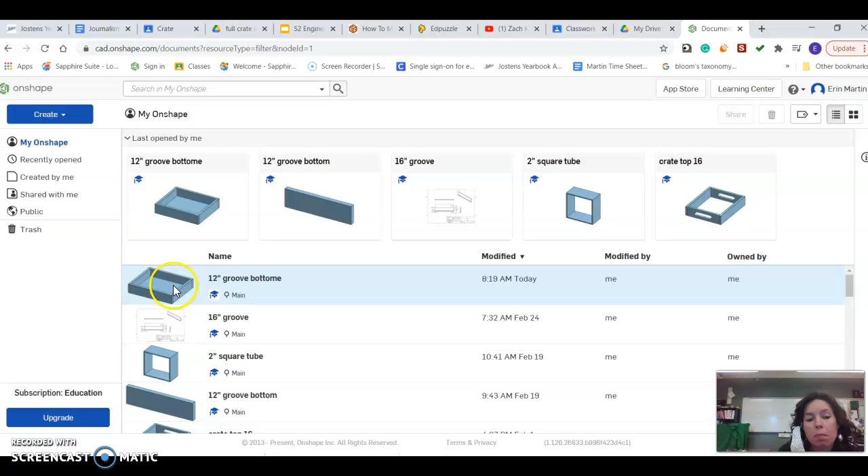In this instructional video, we're going to take a look at adding your stiles to the bottom of your crate. So the first thing you need to do is make sure you can successfully open the bottom assembly to your crate. I would not necessarily think of this being my bottom assembly, except that it's pictured here. The reason it's named my 12-inch groove is because the same main file that I made my groove part in, my groove drawing in, is where I started my assembly. So that's why the assembly takes on that name.

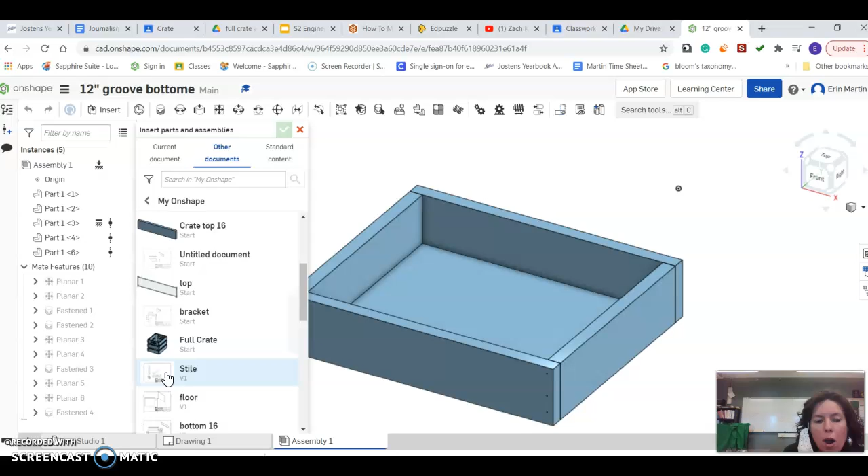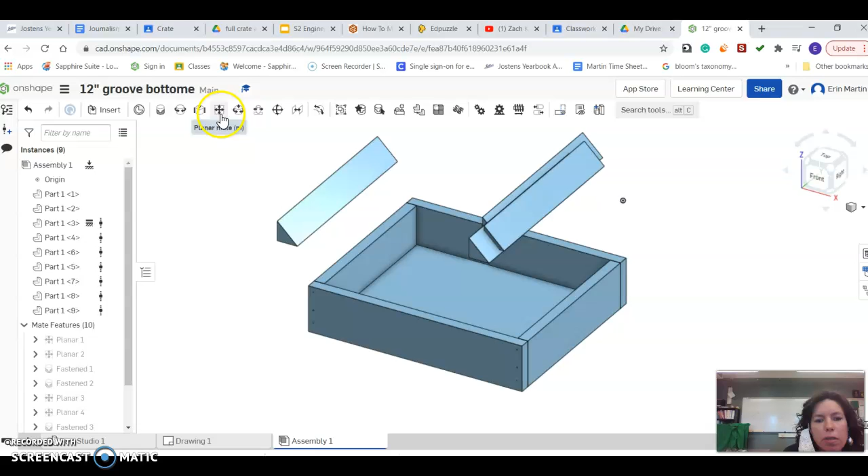So the first thing that I need to do is insert my stiles. If you haven't made those yet, you will need to make those. And again, you might find them as a drawing instead of a part, but it'll show up as a part for you to place in. So you will need 4 of those. I have placed my 4 stiles in, and I'm going to install them one at a time. I'm going to start with a planar mate. We are going to take the bottom of the stile and make it planar with the top of the floor.

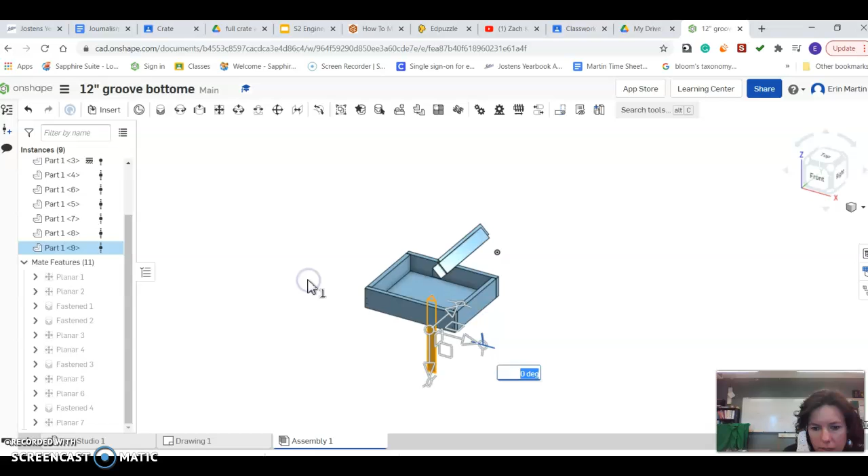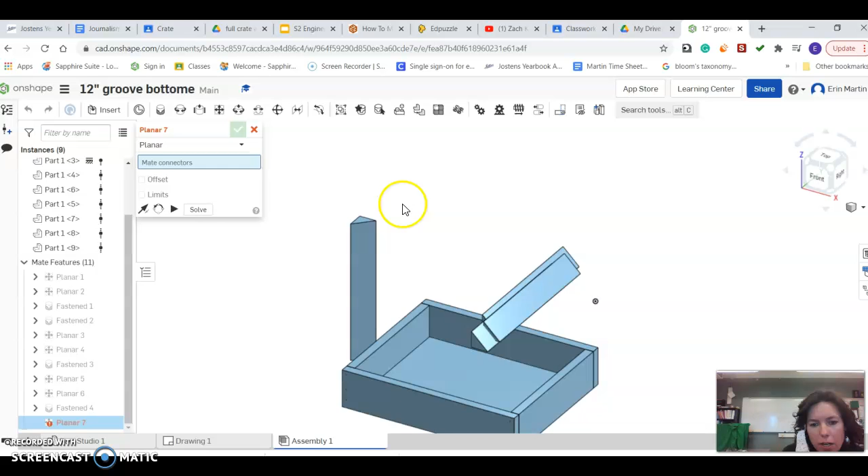I am then going to grab a hold of the stile. You know what? I think there's a step that I should have done first. Let me go back. Before I start, I am going to stand the stile upright. I believe that makes life easier. Now I'm going to go planar: top of the floor, bottom of the stile.

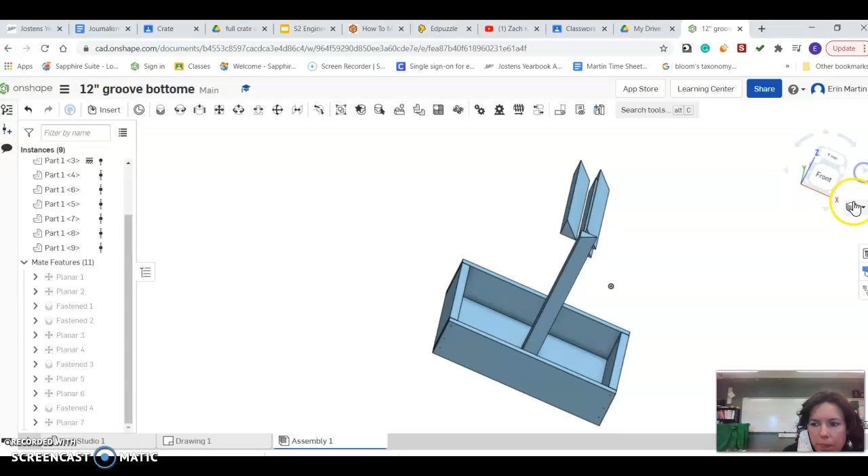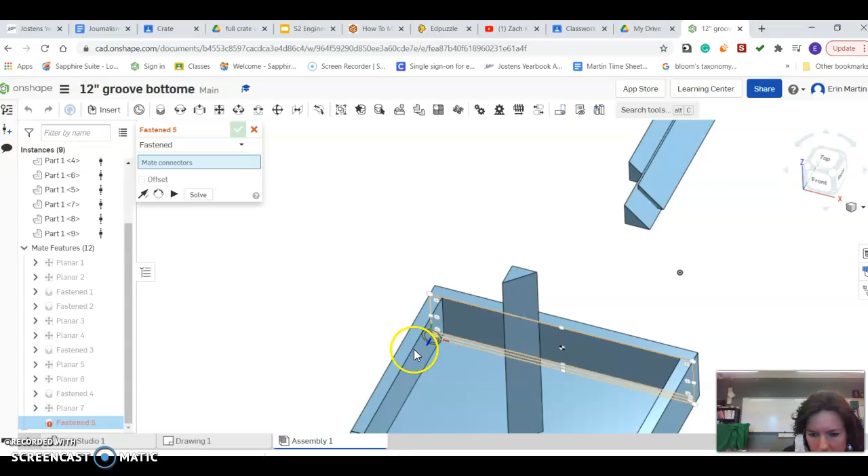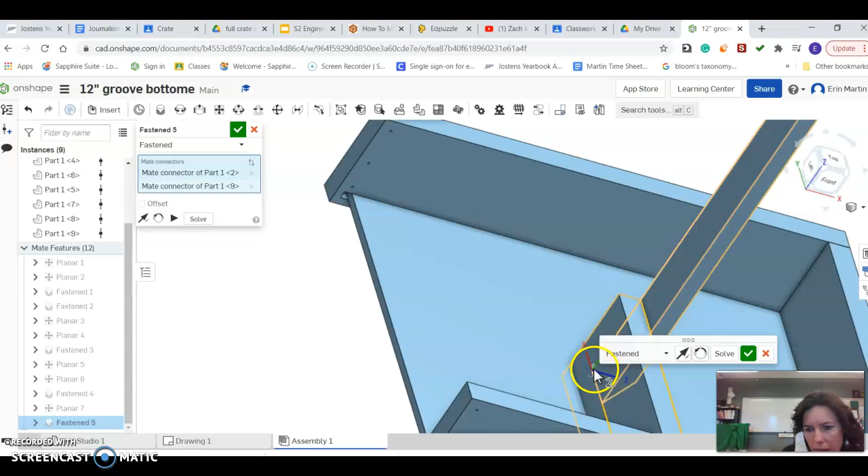So now that stile is sitting in there somewhat correct, I'm going to take that stile and put it in this corner. I'm going to use a fasten mate to do that. And I am going to choose this bottom point, and this bottom point. Don't worry if it looks odd at first, it should jump back into place. And now this stile is connected.

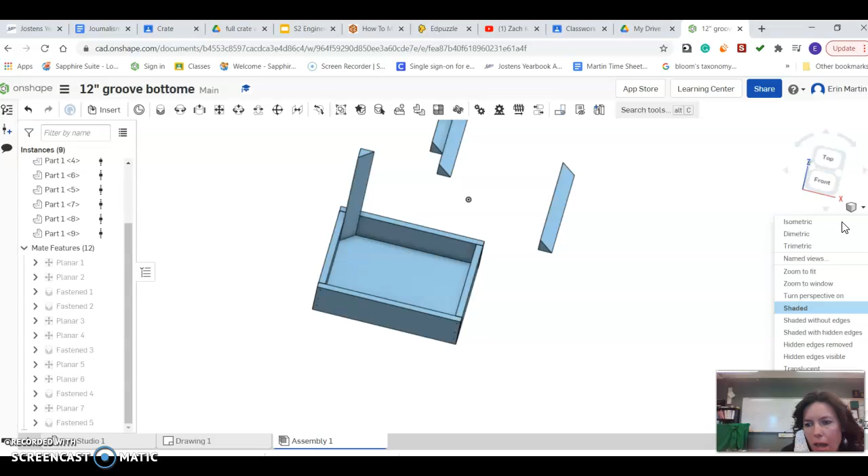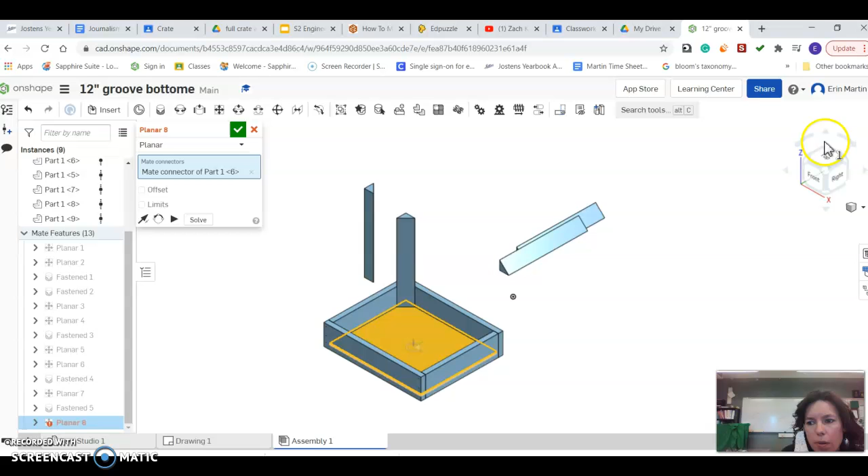So now I'm ready to do the same process to another stile. I'm going to take this stile and start by making it 90 degrees. And depending on where I'm placing this one, I will also want to rotate it another 90 degrees. Now the stile is ready to come into place over here. So again, I am going to start with that planar mate, top of the floor, bottom of the stile,

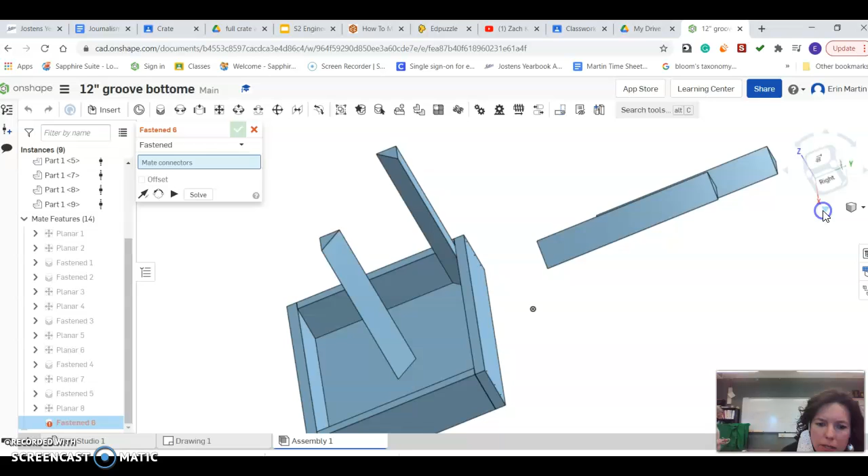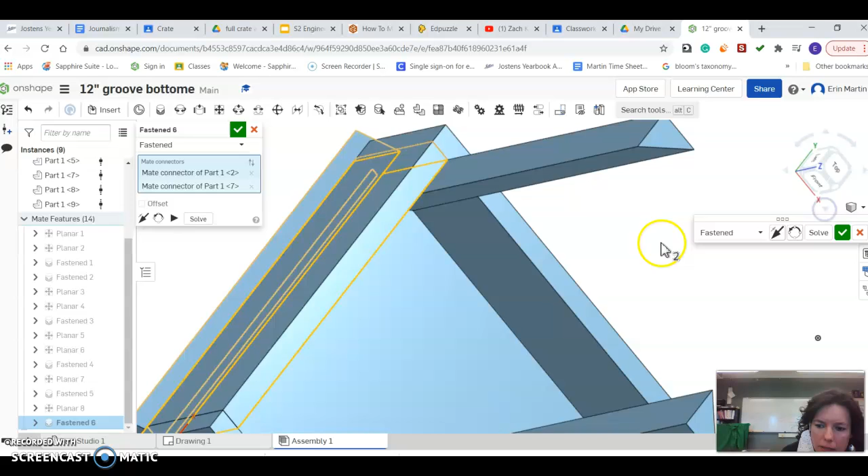and then I'm going to connect it to one of the rails with a fasten mate. And I shouldn't just say one of the rails. You want it to be the 12 because you need it to be on the inside, not the outside. We're going to go with this point, and this point.

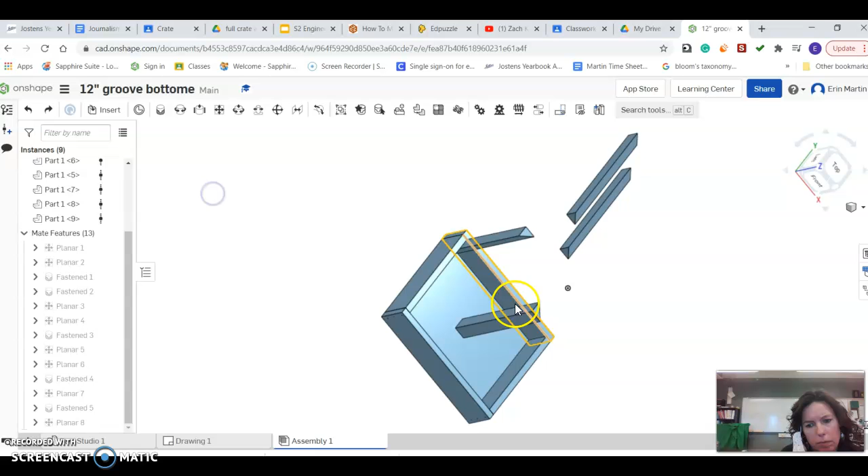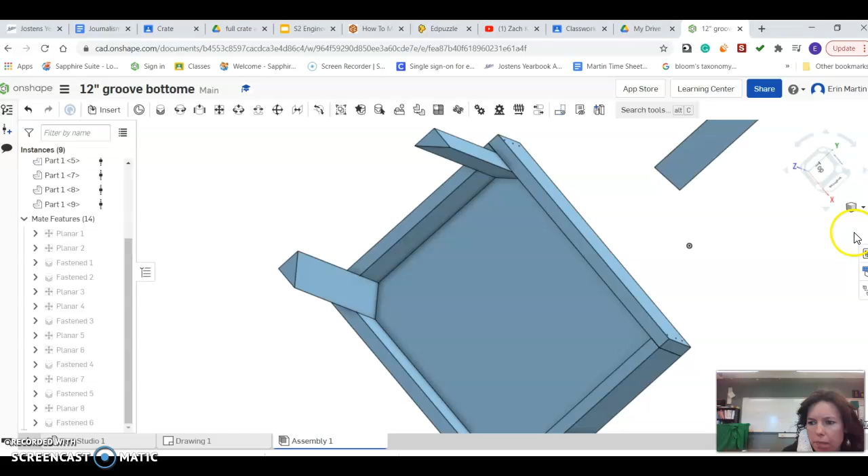And something did not go quite right there. I'm not sure what this line is. So I'm making sure I got that planar. I'm just going to do this fasten mate again. I want this point and this point. So that should give you an idea, and I'm going to repeat that process for the next two stiles.

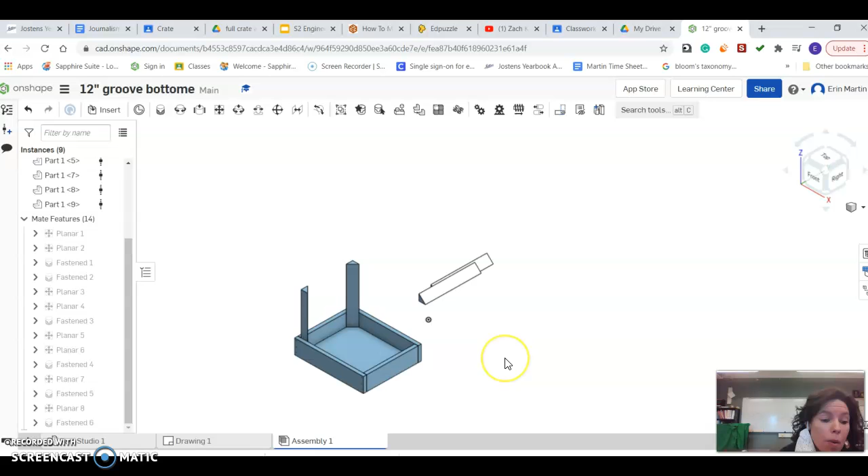Good luck and have fun. Send me pictures, email me if you have questions. It really is just practice. I'm going to be honest, I messed this video up 2 other times this morning before I could send it to you because I was clicking on the wrong items. So it does just take time and patience. Good luck. Your goal for today is to put the stiles in.